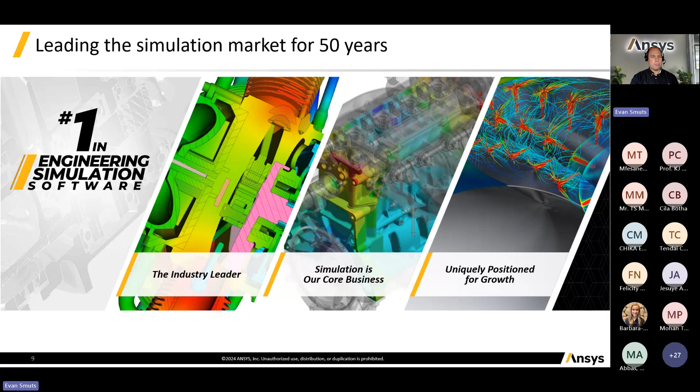So this is why we're not really specific to any particular industry. We kind of go from anything aerospace, defense, telecommunications, biomedical, consumer products, all sorts of areas. We try and be as versatile as we can and integrate all the different products across the different physics as well.

So sort of in a nutshell, we're quite a large company, growing over the last 20, 30 years. Ansys itself is over 50 years old, but over the last 20, 30 years, they've really picked up the pace in terms of growth, mostly through acquisitions, adding very niche and specialized products along the way to broaden their offering across a whole range of different disciplines and industries. So we consider ourselves the best in all of these areas, and also about integrating these products together.

Often when people think of simulation, they think of individual physics, so just a structural analysis or a fluids analysis or something like that. Obviously this discipline has grown over the years. We can do electronics, we can do optical analysis, right down to the photonic level at the chip semiconductor level. So we can really do lots of these individual disciplines, but it's really about bringing these together, connecting them into some sort of multi-physics analysis, which is a lot more realistic than just considering one type of physics at a time.

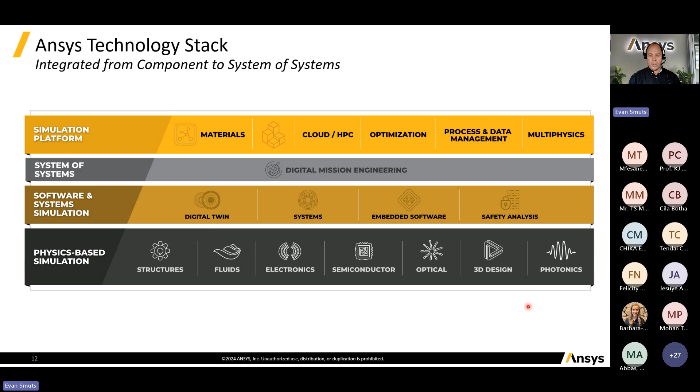And then it's all the kind of support services around this. So what materials do we use in the construction of our components? How do we optimize the design? How do we link this together as part of some bigger system analysis? So we try and link all these different products together to give you a much bigger, broader picture of the type of design or system that you're trying to analyze.

And also one of the real big philosophies of Ansys is simulation is not just this thing that you kind of bring in at the end of the design phase just to tick a box and move on, because often that's too late. By the time you get to the end of the design and you find out there's a problem, you don't really want to go back, or it's very costly to go back and try and redesign things. So a lot of the way the software is developing and growing over time is really about how do we bring simulation in right from the conceptual design phase, looking at designs early enough, trying to eliminate the bad ones and focusing on the good ones before we then put more effort into design of those components.

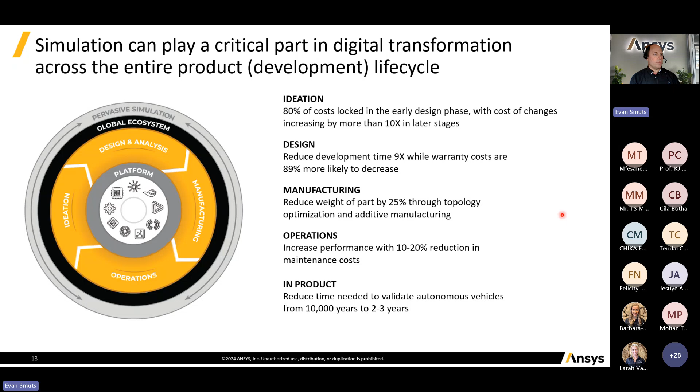And then also taking it further down the line, we look at the manufacturing techniques. Can we simulate these and make them more efficient and better quality? And then we can also look at the actual operation of the product, its in-service operation. So this is where we talk about digital twins. You have your virtual model sitting on the computer somewhere, and we link that to the real world product through some sort of sensor feedback system, so we can compare the real world operation to the virtual operation that we expect from our design. So there's been a lot of development at all kinds of levels of this phase, and we have various products in those different areas.

I'm not necessarily going to go through every single product, but here's an example in terms of linking our product names to the type of things we can do. So anything from antennas and electric motors and things like that. We can look at material design and optimization. We can do optic design, acoustic analysis, structural analysis, and these days even embedded software design, automated design to automatically create the software programs, and then also linking this in terms of safety and how do we design for safe procedures and have reliability in our physical product, but also the software and the control of that product.

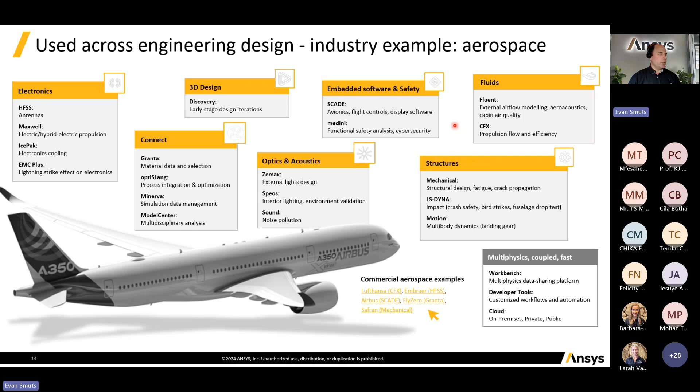So there's been a lot of development across all these different disciplines. And today we're going to focus on how Ansys can help you in academia. This is often the starting point for many people in their simulation journey, where they learn about simulation and get exposed to it.

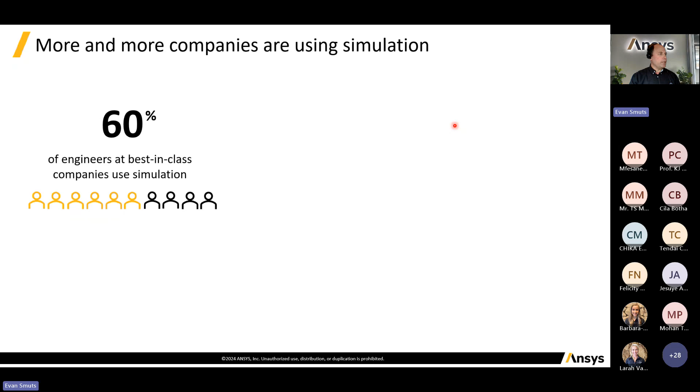In industry, there's growing demand for simulation engineers, or certainly a growing usage of simulation in design. These days, at least 60% of engineers, or certainly the engineers in the top companies, are using simulation in some form. And if we look at the growth over the last 20 odd years, we've almost had a fourfold increase in usage amongst engineers.

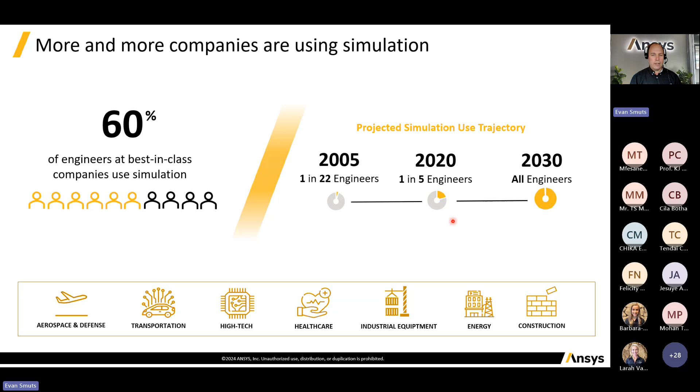We expect this trend to keep continuing to the point where virtually every engineer will need to integrate or use simulation as part of their design cycle. And this is across all industries. So there's certainly a need for engineers to be exposed to simulation in some way, so that when they hit industry, they at least have an idea of what it's all about and how they can use it as a design tool.

So there's various ways to use it. One is as a design tool, one is for research. There's a lot of ways the software can complement the normal design process many engineers are exposed to. So the idea is how can we bring this in at university level, at least expose the students to it in some holistic way, so they're better prepared for when they leave university.

This is where the Ansys Academic program comes in. It's not really a set program, but multiple different tools and offerings that are there to help not only the lecturers, but also the students themselves to really leverage the power of simulation and bring it into their everyday projects. We'll talk about what these different offerings are and where to find them.

This isn't just something quick that Ansys has done. It's really developed over the years, and they've added value to it along the way. We want to help you get access to these different programs to help you in your curriculums.

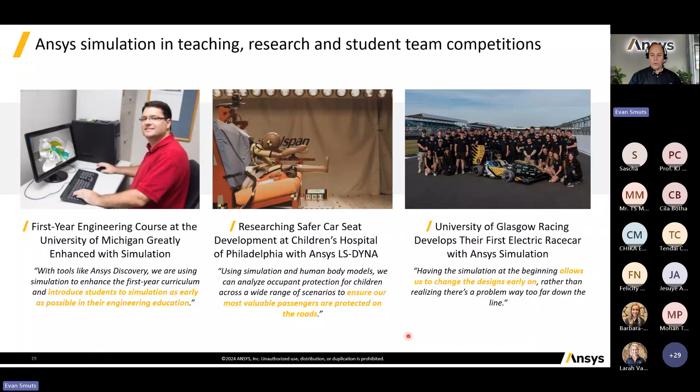And also for further education, think in terms of competition teams or things that happen after hours. There's certainly a lot of support around those, and how students can use that as part of their project work.

We're focusing more on the university and after-school level here, but simulation has also been seen as a way to help high school students access technology they wouldn't normally be able to use. Maybe they can't build lots of structures, but if they've got a computer, they can do some work and study things, particularly things like F1 in Schools. We're looking at developing a partnership here locally with that, through F1 and Formula One racing, integrating the school teams doing STEM education, so maybe there's a way we can bring in simulation to help education in that area as well.

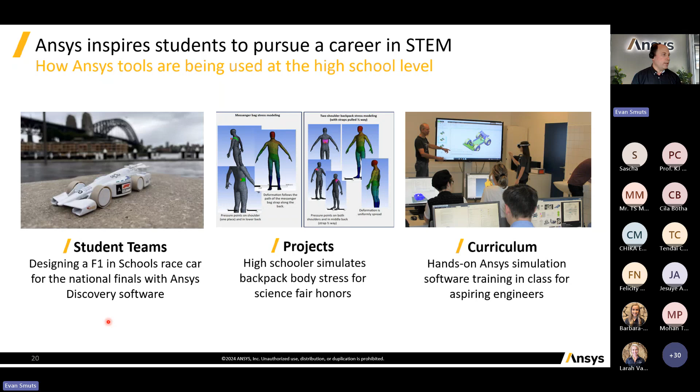So starting off, the starting place for any sort of involvement at a learning institution is to get a license for Ansys.

One of the main offerings we have for academics is what we call the multi-physics campus bundle, or campus solution. It's a bundle of multiple Ansys products all grouped together into one license. So you're not just buying a structural package or a fluids package, you're actually buying a combination of them.

So you get multiple licenses in all the main disciplines, for both research and teaching purposes. We group a whole lot of licenses together because you get more value for money that way, and you can work with different departments. Maybe your fluids team will have their focus, and the electronics guys will have theirs, but somewhere in between they want to do electronics cooling analysis. Now they've got both licenses that can talk to each other, so they can integrate their research and their work as well.

Typically these licenses come in levels. There'll always be a certain amount of research licenses, typically for postgrad research - full level licenses with no restrictions, but with academic terms and conditions attached. We always supplement these with an extra amount of teaching licenses, akin to the student version we'll see shortly. These can be used particularly in the classroom, meant for simpler models and more basic physics, and also to give students access for projects and things like that. So that's how these bundles work, and they're a great starting point for everyone.

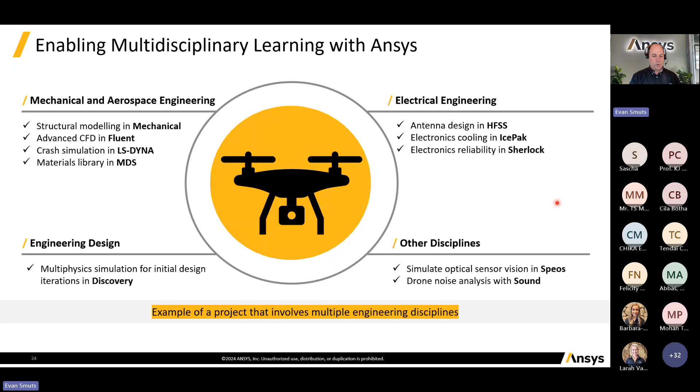So to recap, these multi-physics bundles come with multiple different products that can be used by different departments, each in their own specialization, or they can collaborate and use multiple products together in one project.

This next part doesn't have to be only for students, but it's accessible by students themselves. First up is the student version of Ansys software - a free version that students can download from the Ansys website. There's no licensing requirements at all; you just give your student email address, link on, and the software is valid for a year for you to use.

It's a little bit limited in terms of the size of model you can do with the software, but most of the features are there, and it certainly gives you a taste of simulation. The great thing is you don't need a license, so you can work at home, work offline, wherever you need to be - students don't have to be on campus to use it.

Traditionally, Ansys Student has been very much a mechanical-based product - mechanical FEA, CFD, and all of that. We do differentiate though: there's a separate one for electronics, for those doing HFSS or Maxwell, so motor design, antenna design. We also have one for optics, as well as Rocky, a recent addition for particle-based bulk material handling simulations. And we even have SCADE, for code generation and embedded software control of components.

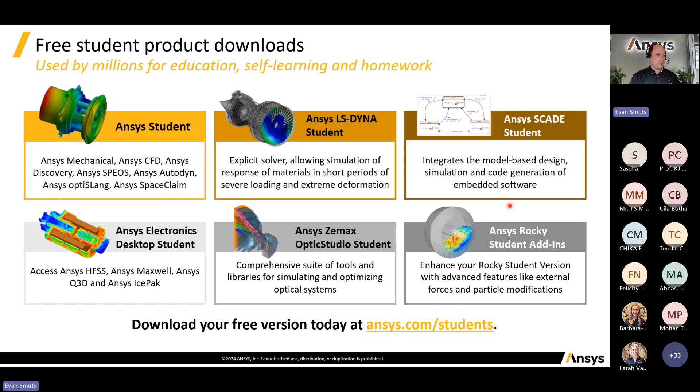Once you've got the software, how do you go about using it? This is where Ansys brings in these innovation courses, as they call it. This is a whole lot of online courses, very short courses that anyone can attend. They are essentially self-paced courses, with different modules, and you work through it bit by bit.

There's background information and a simulation aspect to it, so you can really go there to further your knowledge. Some of it is very much simulation focused on Ansys, but others is just pure basic engineering: What is a turbulence model? How does a viscous fluid work? How do we calculate stress and strain in a material? So there are various general engineering courses there.

This is really to help any user, either you, the lecturers, or the students, get extra value from the software, because now you actually understand what it is you're doing and what the software has to offer. Go to this website, ansys.com/courses, and have a look to see what courses are available there, it might be something to further your knowledge.

Taking this one step further, for users who want more in-depth knowledge on particular Ansys products, we have something called the Learning Hub. This is somewhere students or lecturers can go and access learning material on specific products. We can look at products, or specific applications, maybe composites or battery design. The courses are geared around those topics, with different levels of courses along the way.

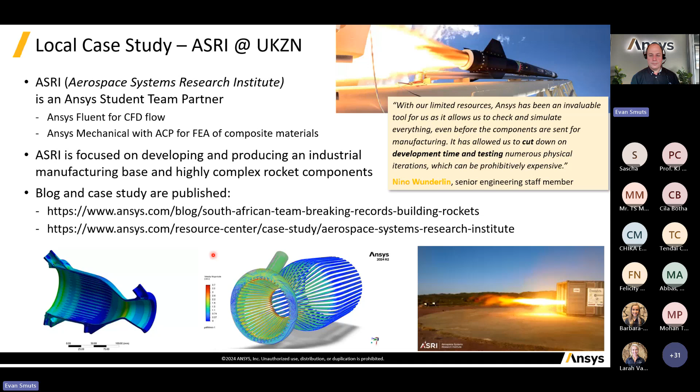So please reach out if you have some sort of project or something like this that you want support or involvement from our side, we're more than happy to help. All right, that's it for the end of our talk for today. Just really highlighting some of the offerings we have to support you as educators, helping to bring simulation to add value, an extra dimension to your teaching. Please reach out to us if you have any questions or if there's any way we can help. Right, that's it, thanks a lot.

Are there any questions? Let's see, is there any questions from the audience? If you don't want to ask, you can put the question in the chat. I think you are going to share the presentation here, Laura. Here's Anel. I think now, Hutu, you can ask if you unmute. Yeah, please go for it. Thank you, just maybe a quick one.

Does Ansys work with other CAD softwares? You could be doing the design work in other software, and then you'd like to do a simulation where that software isn't capable of it. Yes, precisely. We have a CAD tool as part of Ansys, we call it Ansys Discovery, but we're not requiring you to use it. You can do your design in SolidWorks, Creo, whatever, and then bring it into the Ansys products from there. Discovery can translate whatever CAD model you've got and transfer it into an Ansys format, and then you can work with it. So yeah, we're quite happy to work with other sort of software formats.